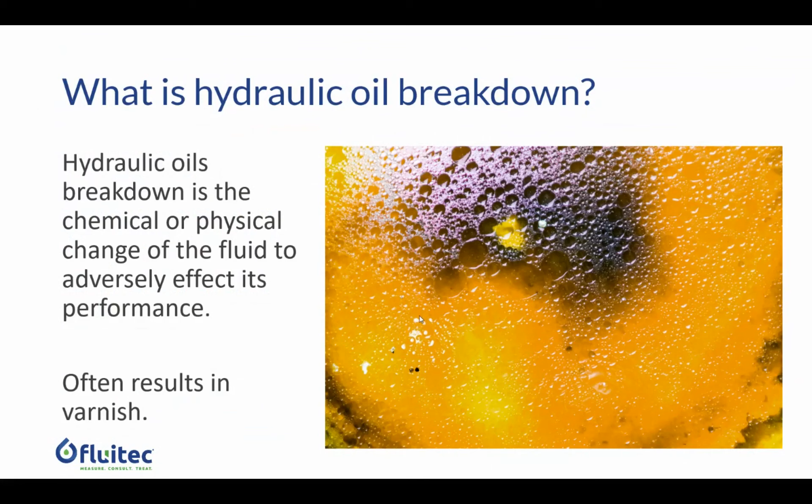It's basically when you have a chemical or physical change in the fluid that starts to adversely impact the performance. And often the result of these chemical or physical changes in the fluid forms deposits or this substance known as varnish. So what do we actually mean by varnish? Well, varnish is just a generic term. And there are literally dozens of different chemicals that will make up a varnish deposit. So it is based on the operating conditions of the machine, formulation of the oil, and all sorts of various different contaminants that may ingress into the fluid that can create unique new oil degradation pathways. So we just define varnish in a very simple way by saying it's an oil-derived deposit.

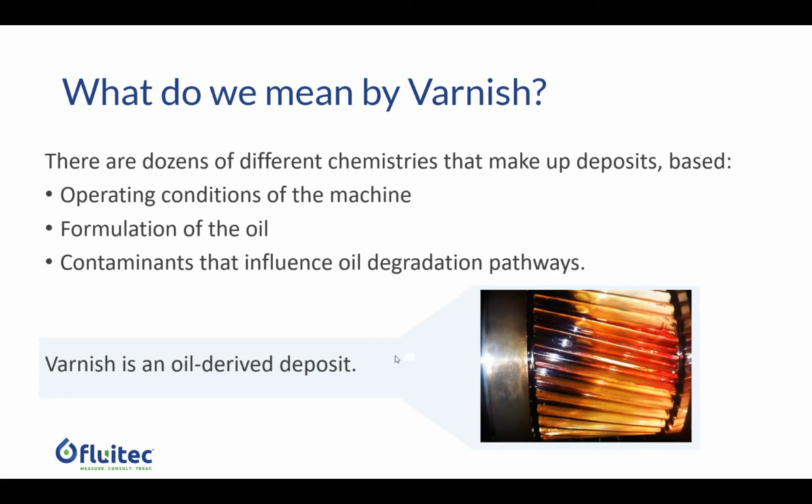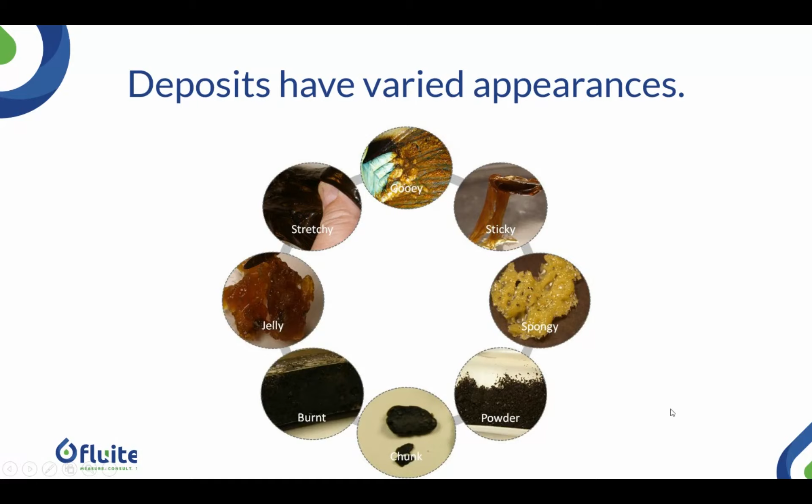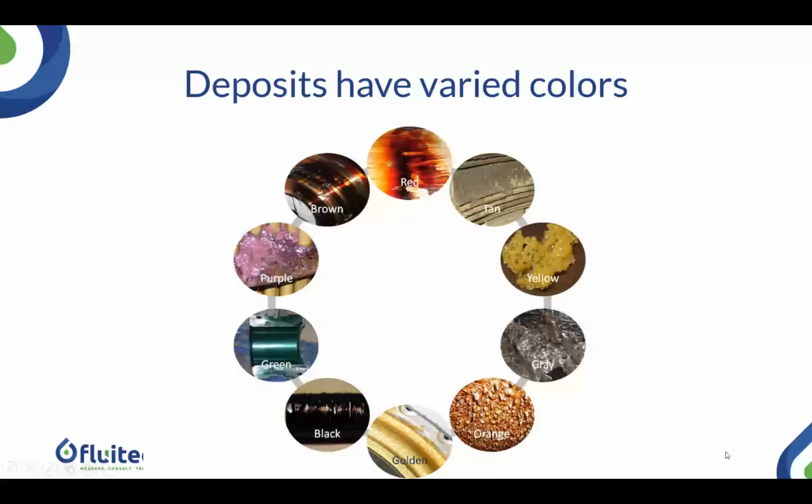These deposits come in a wide range of different appearances. They can be gelatinous in nature, or gooey, or stretchy, or sticky, or powdery. So we see it come in a wide range of different consistencies, and not quite a rainbow of colors, but many different colors as well. We've seen some really bright colors to some very dark black, grayish colors, and almost everything in between. But ultimately, there are various different modes of degradation that are causing this fluid to break down.

If you happen to see my colleague Jo's webinar last week, he showed this slide, and he was talking a little more on compressor fluids and journal bearing challenges, and focused on gas and incompatibility as a couple modes of failure. So I'm going to just talk about oxidation and microdieseling. And again, going through this in detail is probably beyond the scope of this webinar, but the big point I want you to take away from this is that there are, in fact, multiple different modes of degradation that can be occurring and causing the fluid to break down.

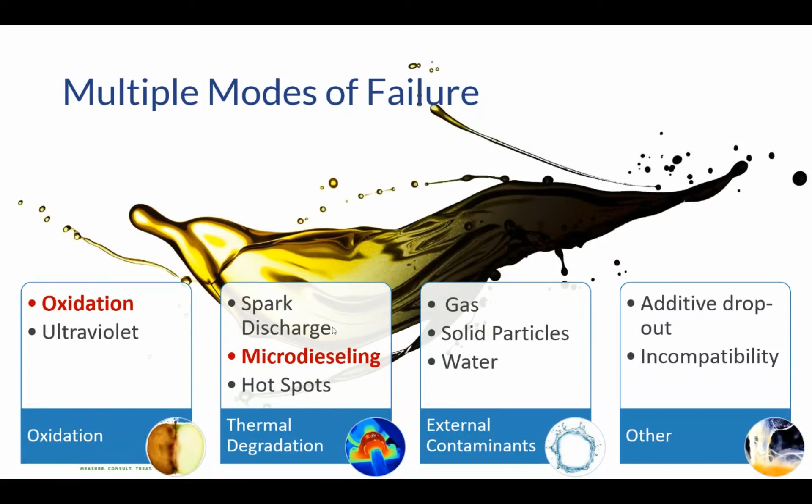So the first one is oxidation, and this is intuitively something I think we all understand. And using an apple as an analogy makes it pretty easy. We use this analogy for two reasons, because everybody knows what will happen if you take a bite of an apple and leave it exposed in your room for a period of time. It's going to start to oxidize almost while you're watching it. But we also like using the analogy of the skin of the apple being akin to antioxidants that may be in your fluid. It makes up a very small percentage of the overall volume of either the apple or the oil. But as soon as that little protective layer is removed, then the apple, or in the case of the oil, will fail rapidly.

So what is actually happening here is that when oxidation occurs, essentially this is just the formation of, it's corrupting a molecule and forming an unpaired electron. And basically this molecule is not very comfortable having an unpaired electron. So it's looking to grab another electron from something, and it will grab another electron from a healthy molecule, and it triggers this chain reaction. And it will continue to go on and on and on in a process that we call autooxidation, until all of the healthy molecules have been corrupted, and or there's something that terminates that.

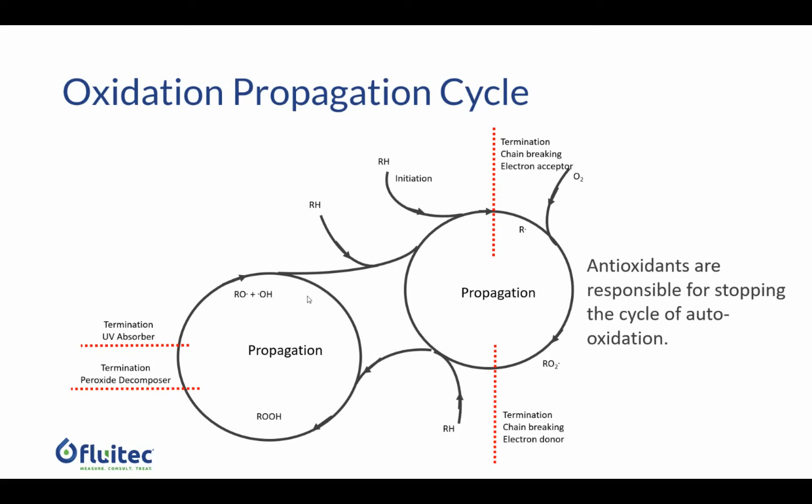And so what actually terminates this auto-oxidative reaction are antioxidants. And so there's a couple different types of antioxidants. You can have primary antioxidants, which will either accept the electron or donate an electron to the molecule, or you'll have a secondary antioxidant, which will actually decompose one of the oxidative degradation products known as peroxides. So the thing to keep in mind here is that once oxidation happens, if you don't have any antioxidants in your fluid, this is a reaction that will continue to go on and go on and go on until everything fails.

I would say it's not so common, especially in newer formulations. In older formulations, say using a group 1 base stock with a little higher solubility, it keeps all of these degradation products in solution. Some of these degradative products will have a higher hydrocarbon chain length and higher molecular weight, and will therefore impact the viscosity of the fluid, whereas with more hydro-treated, highly refined base stock, like a group 2 or a group 3 base stock, these degradation products are really not so stable in the fluid and will come out and form deposits. And so in most group 2, group 3 formulations, you don't actually see viscosity as an impact of oxidation nearly to the same level that we did a decade or two ago.

So the second mode of degradation, which really ties specifically to hydraulic applications, is a process called microdieseling. Microdieseling is a phenomenon where we've moved from the slow, gentle degradation of the fluid from an oxidative perspective to a much more rapid event-based degradation, dealing with really high temperatures that we would categorize as thermal degradation. Thermal degradation essentially is when you have a high enough temperature that can actually crack the backbone of the hydrocarbon base stock, and typically we're seeing events that cause these really, really high temperature zones in the fluid.

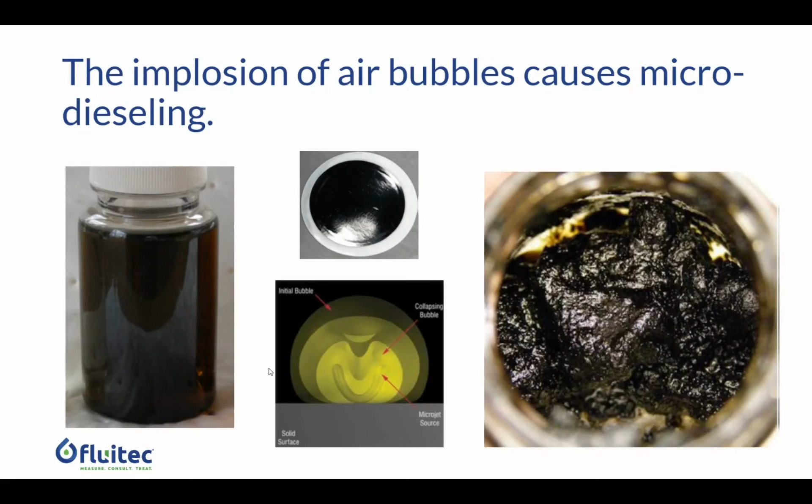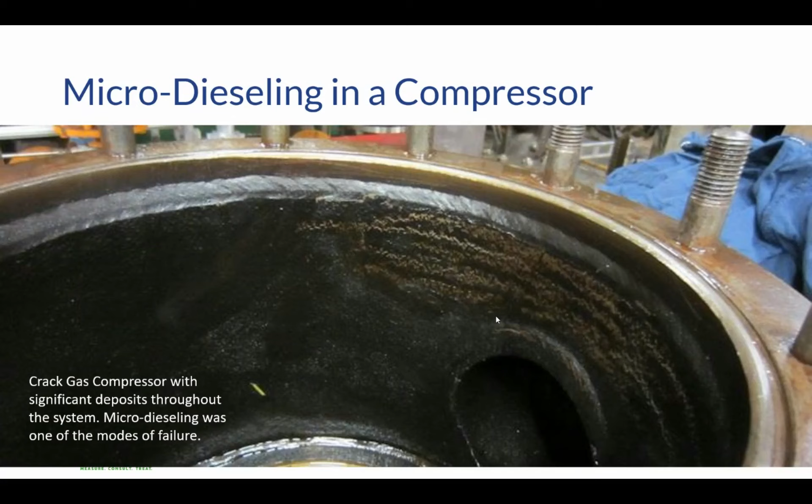One of the primary places that we see this is in phosphate ester electrohydraulic control systems for steam turbines. There are some hydroelectric hydraulic systems and the governor system that may have microdieseling. Sometimes we see it in compressors, but microdieseling is very much an application-based degradation mechanism. For example, we've never seen this in, say, a gas turbine or a steam turbine. So it's very much application specific, and it's especially susceptible to hydraulic systems. So just keep that in mind. If your fluid starts to turn black, you may have microdieseling, and then there are specific things you can do to correct that problem.

And just a little public service announcement: social distancing is something that we are all practicing right now. This is actually not too bad for your oil as well. Just along the lines of compatibility, oils don't mix so well. Practice social distancing on your lubricants as well.

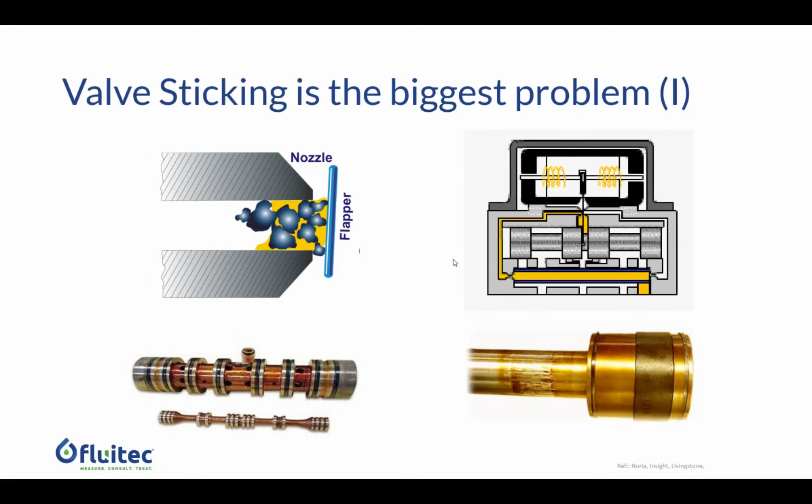All right, so that's just a little bit about oil breakdown. Why do we care? Well, essentially, oil breakdown is impacting and impairing the performance of the lubricant, which ultimately relates to your operation and the profitability of your operation. Some of the impacts that we see with deposit formation: valve stiction is a big one. As a servo valve is moving, there are extremely tight tolerances, and just a small buildup of deposits can really impair the functionality of the valve, may cause the valve to stick, or in some cases seize, and your system's not going to operate or be controlled so well if your servo valves aren't properly being exercised.

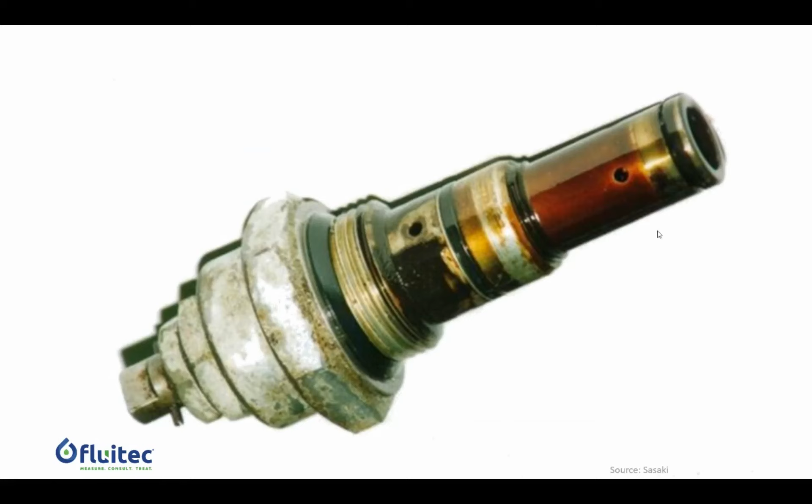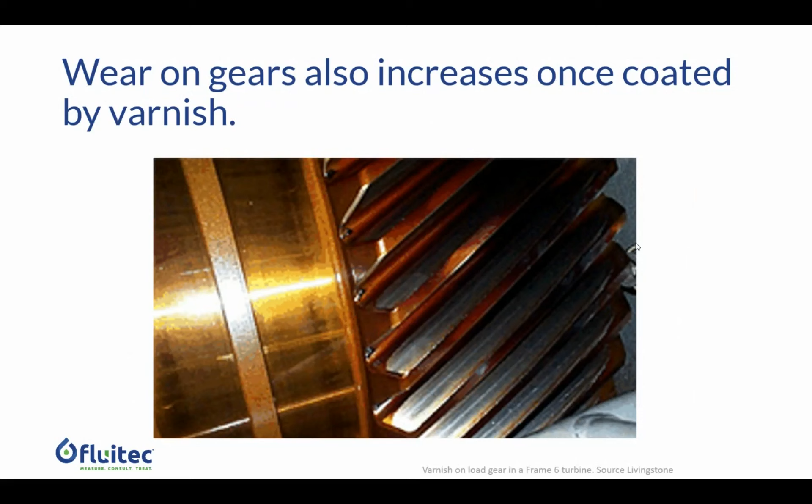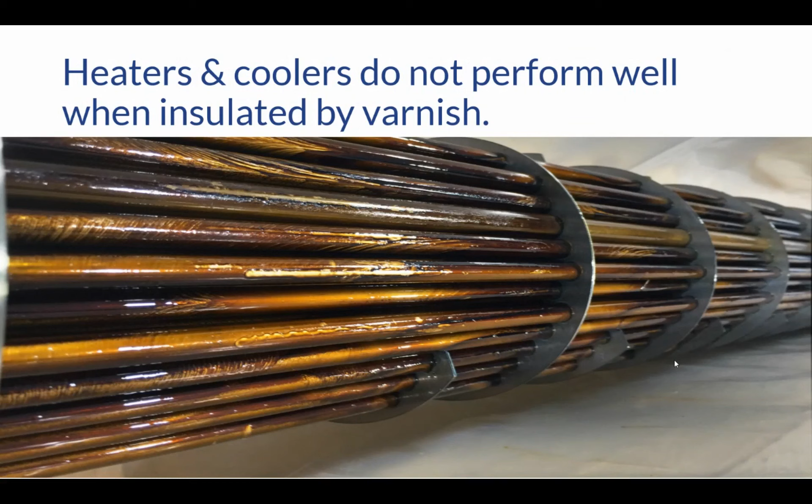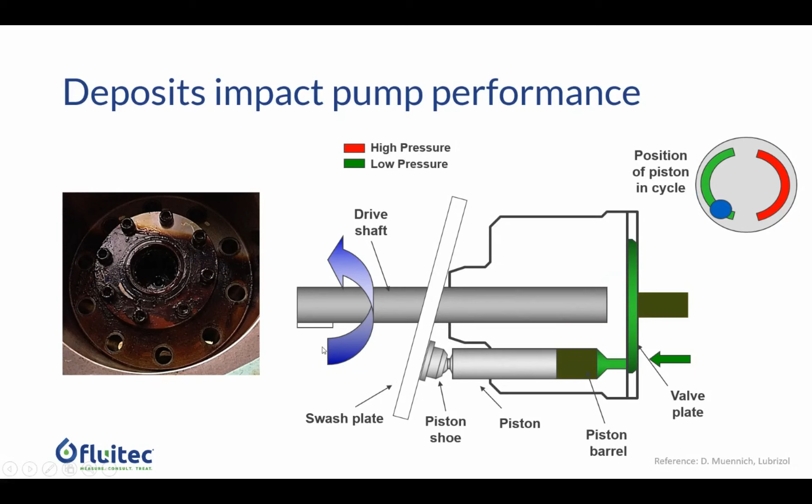This is a picture from a plastic injection molding machine, also a fairly heavily varnished valve. Varnish can also coat filters, causing filters to slime over and shorten their life. If you have deposits on gears, varnish can attract other dirt, debris, and wear metal material and create a sandpaper-like surface and actually increase the wear rate in gears. Heat exchangers are a fantastic place for varnish to form. Unfortunately, one of varnish's properties is that it's a great insulator, so if you have a plugged or coated heat exchanger with deposits, it's not going to function so well, and therefore it's not going to allow you to maintain the temperature of your oil. And then finally, in hydraulic systems, we see pumps are also impacted by deposits, and so we see premature pump failure as well.

Okay, so we're going to do a quick poll here, because I'd like you to see what is the biggest management problem that we see with hydraulic oils, and I'd love to get your thoughts on this. So let's go over to Greg. Can you run the poll here for us?

All right, I will open it up right now. What is the number one biggest management issue with hydraulic oil? The correct oil analysis tests are not performed. Incompatible fluids are mixed together, resulting in deposits. Cheap oil is purchased, and people are basically buying cheap oil, and that fails rapidly. Or poor storage practices. Let's see. Show results.

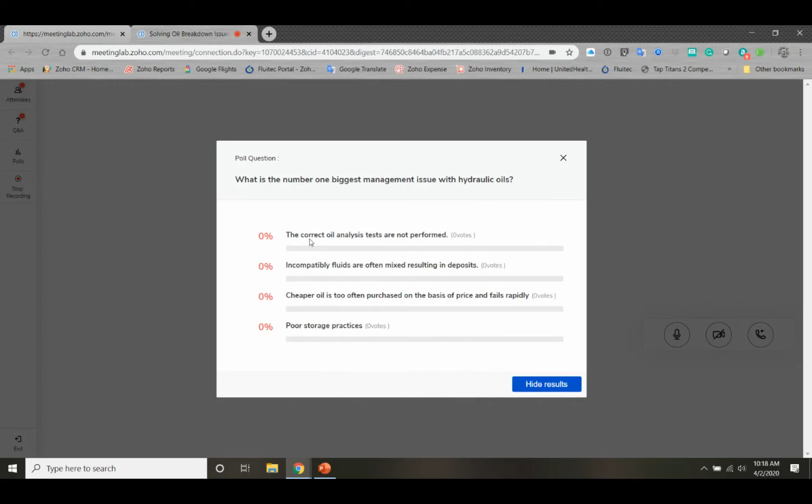Let's see. Does this give you an opportunity to select one of these four options? Well, I don't see where it gives an opportunity to poll. We'll work on it. Just continue on. We'll work on this. Okay. All right. That sounds good.

Okay. Excellent. Well, I want to make the argument here that all of the different answers can certainly be challenges. If people are buying the cheapest oil possible, that's certainly a challenge. If you're not storing the oil properly, that's a pretty major challenge. But I really believe the biggest management problem that we're seeing with hydraulic oils right now is on the oil analysis side.

One of the business philosophers or strategists that I really like is Edwards Deming. He has the saying, you can't manage what you don't measure. This is a principle we hold dearly at Fluitec. Pretty much everything we do, there are metrics around it and we measure. But from an oil analysis point of view, this is why we're doing oil analysis. And if you are not running the right tests that identify how the oil is failing and breaking down, then you're going to run into problems. So this, I think, is the biggest management issue we have in the world of hydraulic oils. So let's talk a little bit about how we go ahead and measure these fluids.

Some of the key tests for monitoring hydraulic oils: viscosity. You want to look at contaminants, interaction with contaminants, chemical changes, and oil degradation. Ultimately, when you select your test slate for oil analysis, the first thing you need to understand is what the modes of failure are, what things should I see that will change over the life of the fluid, and how does that directly tie to the performance of my equipment and my fluid.

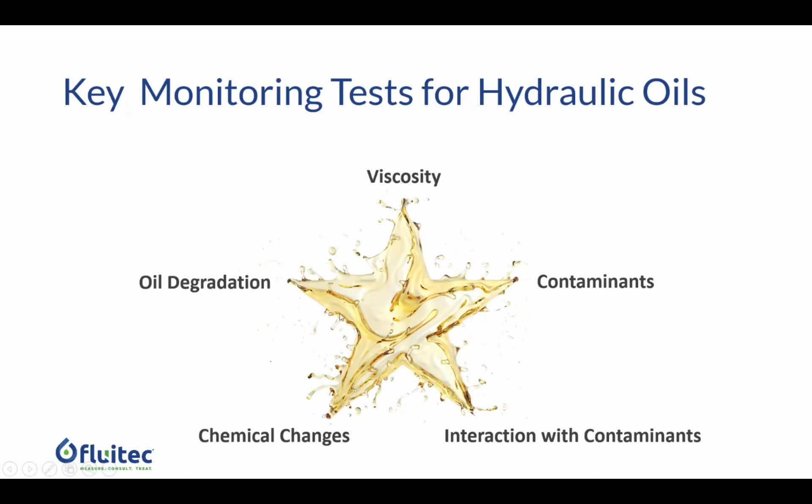Contaminants: in the world of hydraulics, hydraulic oil users are really on the cutting edge of this. Understanding particle counts and water is really critical. Interaction with contaminants: how does a fluid interact when you have a bunch of water mixed into it? How quickly does it separate from water? Or air bubbles. Do the air bubbles form at the surface and create foam? Do the air bubbles dissipate quickly when they are contained inside the fluid? These are all important properties to manage. And oil degradation certainly as well, because it is one of the primary modes of this fluid failing. So we should be understanding oil degradation.

So all critical properties that we want to monitor. The next is oil degradation. And so oil degradation, again, I would say this is really one of the biggest problems that we see with hydraulic oils. Most hydraulic oil users are running oil analysis. However, traditional oil analysis packages do not do a very good job of identifying varnish problems.

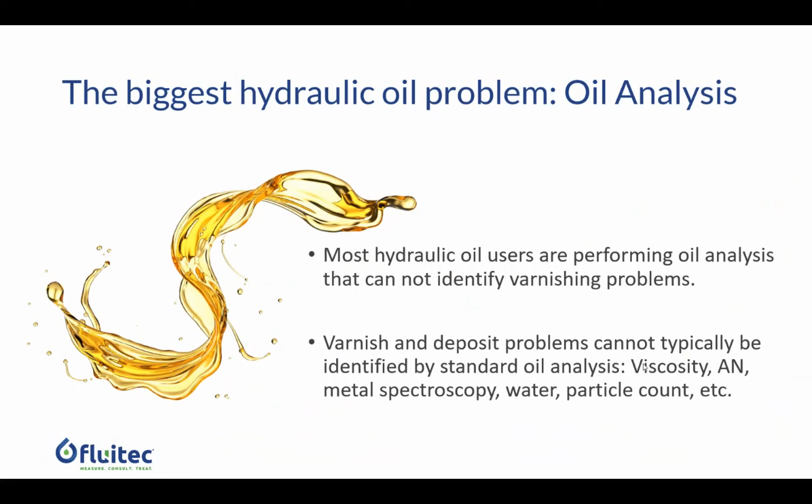So viscosity, acid number, metal spectroscopy, water, particle counts. In most cases, these cannot tell you if you have a varnish problem. However, we have a really simple, good tool for this, known as the membrane patch colorimetry test, or MPC. And ASTM D7843 is the test procedure for this.

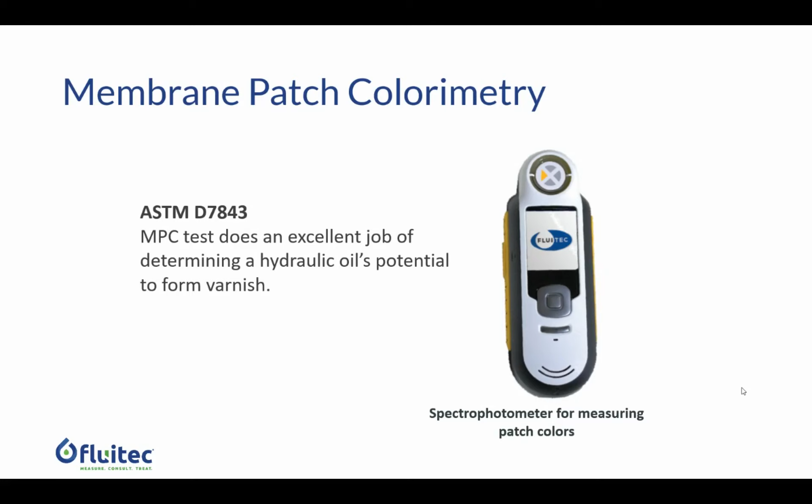This was developed for turbine oils, starting in the early 2000s, really to address this varnish pandemic that was impacting gas turbines. And again, in the world of gas turbines, all of these gas turbine failures and unit trips were happening, and all of the oil analysis results said everything looked good. So we had to develop a test specifically to look for varnish formation.

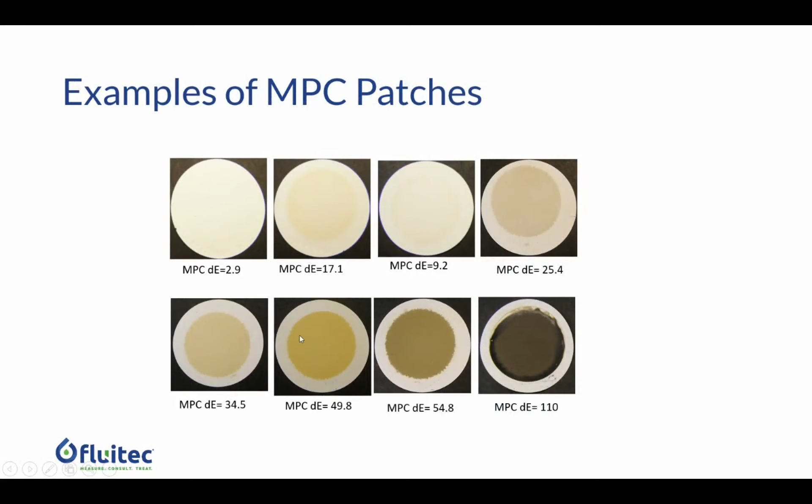The MPC test is a simple test. You add a little bit of oil with a little bit of solvent, and you filter it through a membrane. The membrane is 0.45 microns. Basically, if the color of the patch is dark, there's a high chance that you have varnish. If the color of the patch is light, it's suggesting that you may not. So it's a simple test. We use this little color spectrophotometer here to actually measure and quantify the color on this patch.

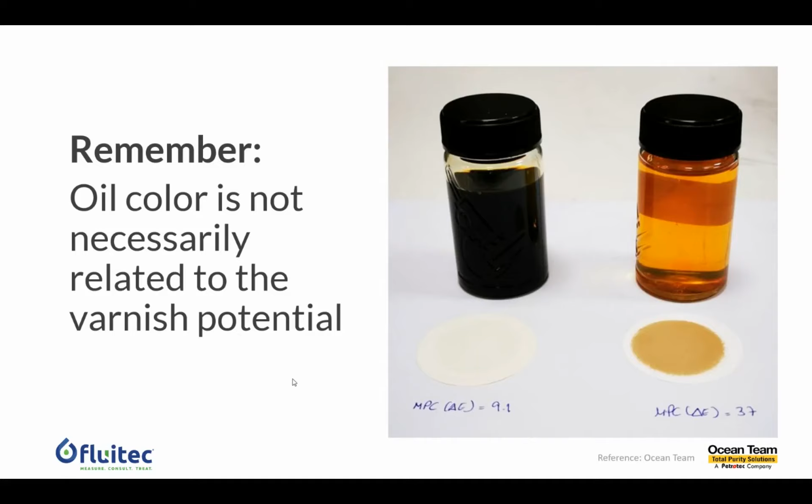So the MPC test, even though it was developed in the early 2000s for turbine oils, the history of this dates back earlier than that. The first iterations of this were developed in Japan by Dr. Suzuki, and it's a colorimetric analysis that he used on literally over 10,000 hydraulic samples. So this is something that is very well suited to hydraulic oil applications as well.

And so this is just kind of a thought exercise, but I don't think we've published any details on this. But we've done a lot of testing in our lab on this, and typically an MPC of 40 will represent about 200 ppm of oil degradation products. And that's kind of surprising. It's a pretty low value, I think, especially because it can create a lot of deposits that you can see throughout your whole system. But it actually makes up a fairly small amount of material that's actually in the oil. Okay.

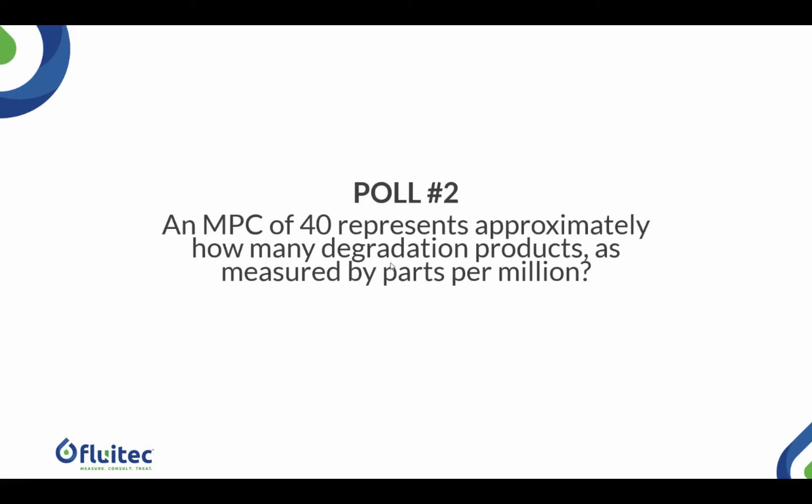One thing that I have been questioning recently is that it seems that hydraulic oil users have been absolutely on the cutting edge of understanding particles and ISO particle counts, however, there's really a lag compared to, say, the power generation world in measuring oil degradation products. Why is this? So in reflecting on this, I think it's a little bit of an issue of the fact that oil degradation products in turbines will cause really expensive events. So a trip can be an extremely expensive event for a power plant, which warrants immediate attention and a lot of focus from senior management on what happened with this oil.

Why is the unit no longer producing power? Whereas in hydraulic systems, there are so many controls that typically oil degradation products and varnish will result in a slow decay in the system and reduced efficiency over time, but not necessarily big expensive events. And even if you have a pump fail or a valve fail, which can be somewhat common, hydraulic systems are often smaller, so it's still not a super expensive event.

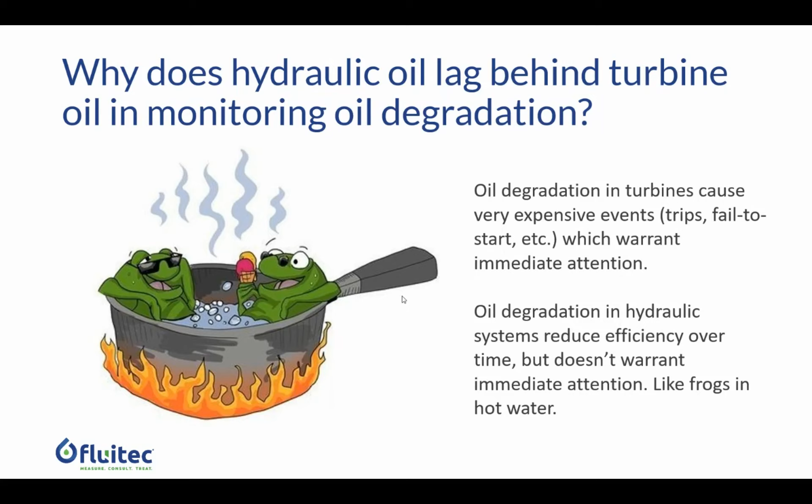And so I'd like to think of the analogy of frogs sitting in hot water, who will sit there until it's boiling and don't really notice until it is boiling. I think this is one of the contributing issues why we see oil degradation testing not performed as regularly as it should be with hydraulic oil users. So don't be frogs in hot water. Run your MPC test.

All right. The next part I want to talk about is one of the additive components that is very common in many hydraulic oil formulations. It's a chemistry known as zinc dialkyldithiophosphate, or ZDDP, a really cool additive that we've been using for decades. It's fairly inexpensive and provides not only strong anti-wear protection, but also antioxidant protection, so it's a multifunctional additive chemistry. Since it's in so many hydraulic oils, it's important to understand how to measure its health.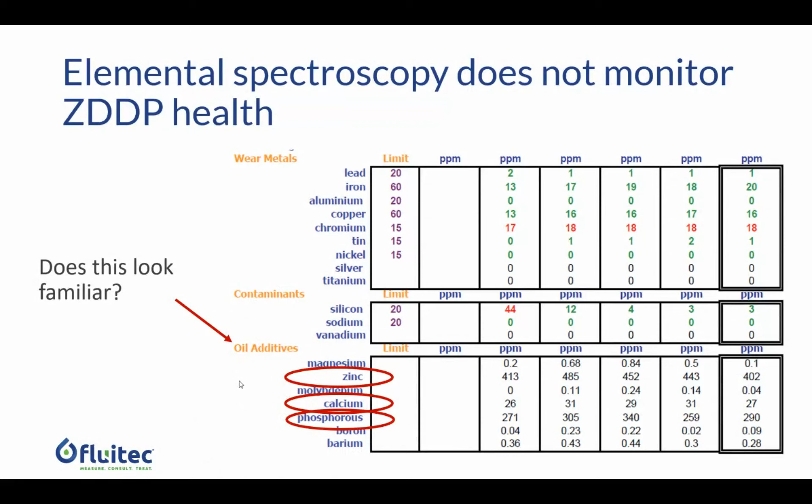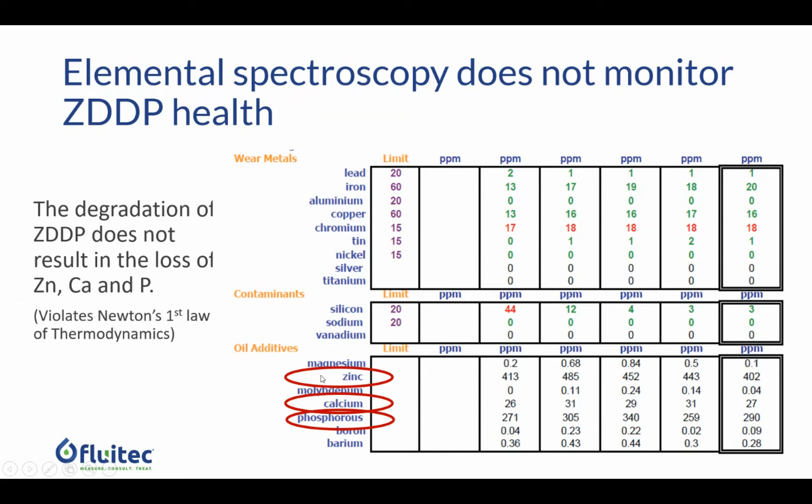A lot of people will just look at this value and say, hey, my hydraulic oil is healthy, everything looks good, zinc hasn't changed at all. When in fact, the ZDDP molecule may be completely decomposed and not providing any protection in your system at all, but it's still showing up as zinc until it actually comes out of the fluid and forms sludge. It's always going to be measured in the fluid, and does not necessarily tell you the health of the ZDDP molecule. So how can we best understand this chemistry?

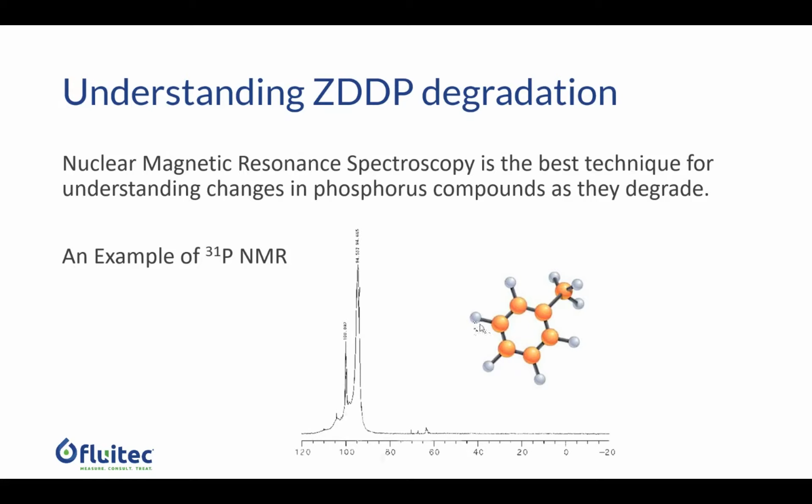I'm not going to go into great detail on this, but this is a cool example that shows some of the complexities involved with ZDDP chemistries. This is a test known as P31 NMR, nuclear magnetic resonance spectroscopy. It's very similar to an MRI. If you ever go to the doctor and need an MRI, it's a very similar test, but in this case, we are looking at changes in phosphorus compounds. And here is some of the complexity that we see with ZDDP degradation.

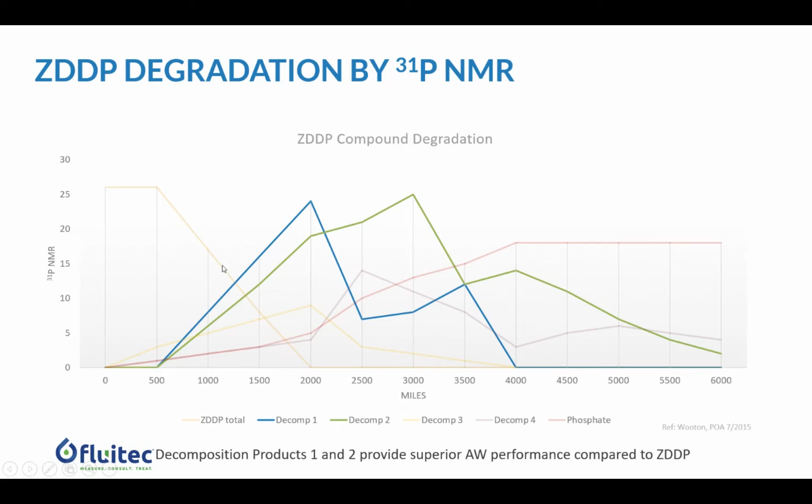This is an engine oil application over 6,000 miles. The first thing we're looking at is the actual ZDDP molecule, and at 2,000 miles, there's no more ZDDP. It's completely decomposed. However, decomposition products have formed through this degradation, and decomposition products 1 and 2 can actually provide superior anti-wear protection compared to the original ZDDP molecule. So even though ZDDP is depleted, it's still providing a strong level of AW performance.

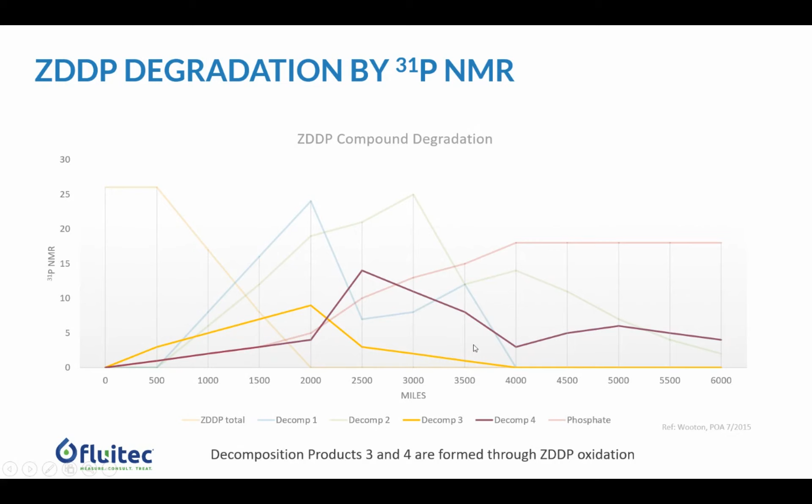The next two decomposition products are formed through oxidative reactions, so again failing through a very different reaction, no longer an anti-wear reaction but more of an oxidative reaction. And then the final product from ZDDP degradation is a phosphate, which gradually forms as these decomposition products are reacted out as well.

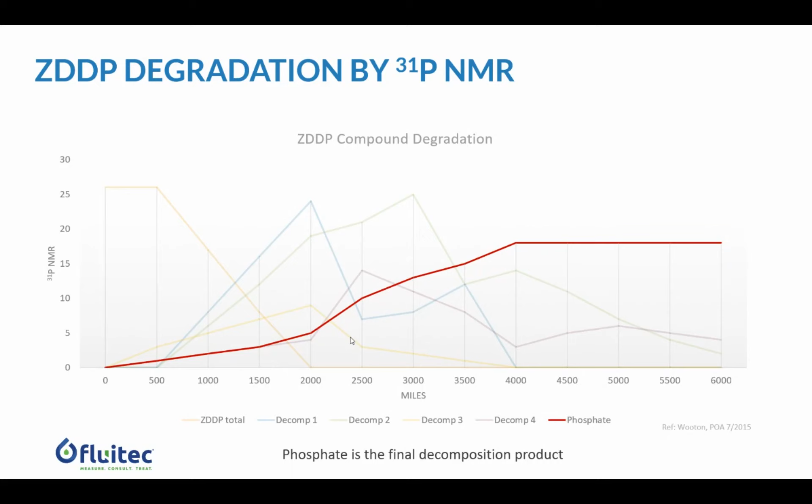So what a cool tool. Are we going to incorporate P31 NMR in our oil analysis program? No, I would say this is much more on the research side of things. It's an expensive test, and it's really complex to understand the chemistry. The purpose of me going through this is not to encourage you to incorporate it in your oil analysis program, but just to give you an example that there are a lot of things going on when ZDDP is decomposing.

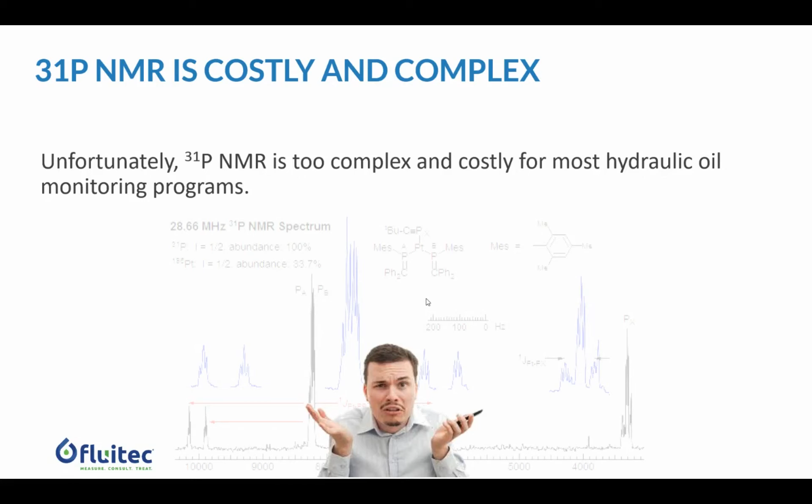And at the end of the day, you still will have a little bit of zinc and phosphorus and calcium left in the fluid that you're measuring in your oil analysis program. And it doesn't necessarily mean the oil is not healthy. So one of the things you can do that's much more economical, that all labs should be able to run for you, is a D7412 FTIR test, which is looking at the total spectrum of the ZDDP molecule, and this can provide some level of indication of the health of that molecule.

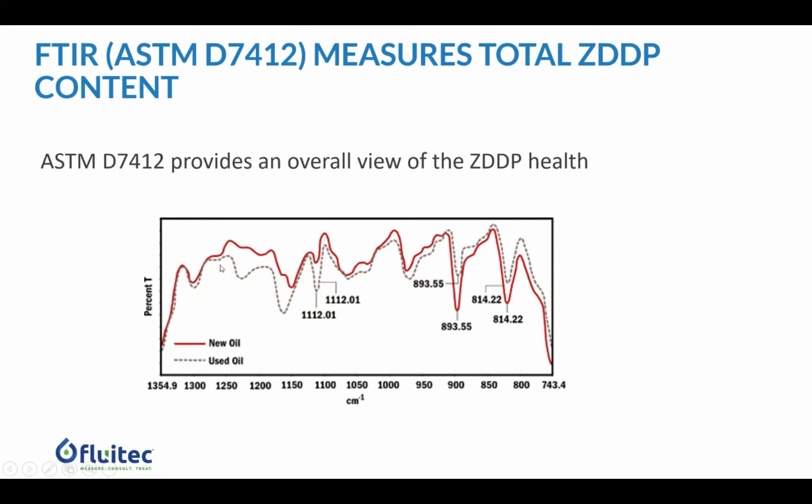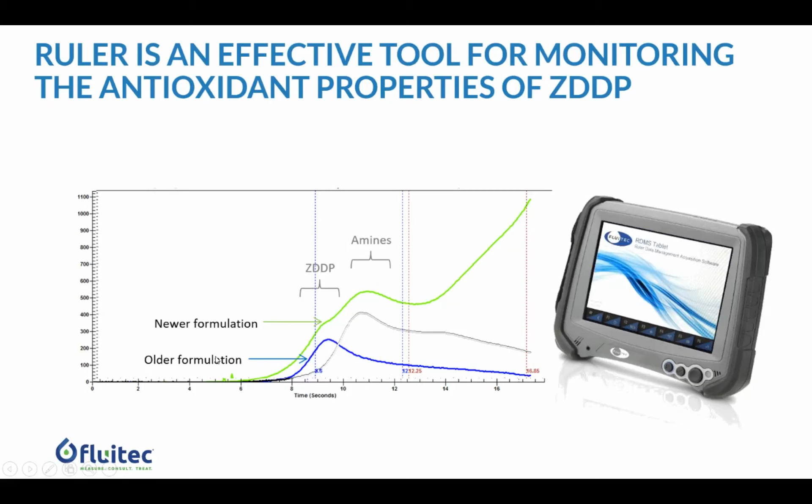The other thing is, because that ZDDP molecule acts as an antioxidant, the RULER test is really good. So the RULER test is not measuring zinc or phosphorus, it's measuring the antioxidant properties of the fluid. And so even if the antioxidants are completely gone, it doesn't necessarily mean the antiwear properties are gone. So that's just something to keep in mind. But if you add these two tests together, it really can give you a better insight into the health of your ZDDP molecule, whereas I would say elemental spectroscopy does not really reveal too much about the health of this particular additive chemistry.

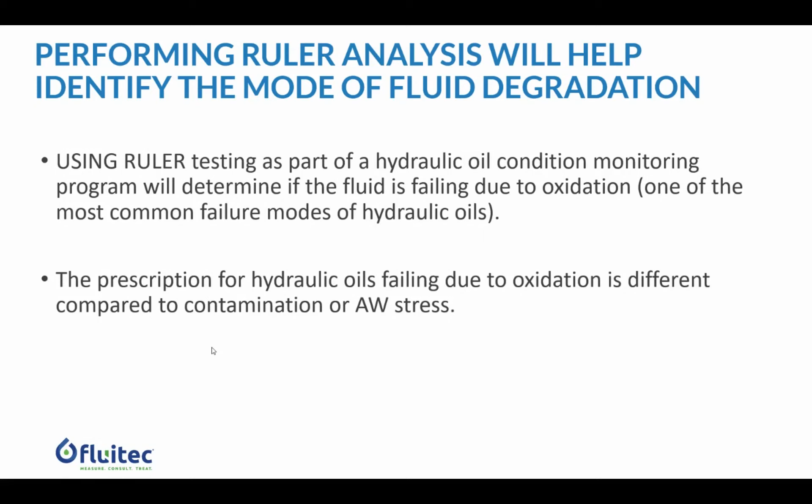Okay, a little bit on oil analysis. I think the big takeaway here is fluids are failing. Hydraulic oils fail often due to oxidative stresses and the formation of deposits. You don't want to be blind to this, and ignorance is not bliss, because it will in fact result in operational issues and costs. So it's much cheaper to understand the issue and do the right test at the right time.

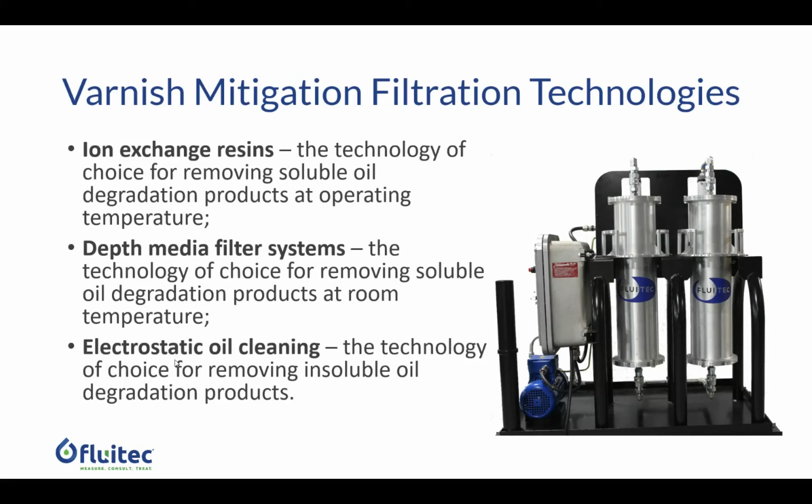The next thing I'm going to talk about is different things we can do to control these degradation products in hydraulic fluids. So varnish filtration technologies is something that I would say is near and dear to my heart, and what Fluitec's been involved in for the last quarter century. We have done a lot of work with resin media to remove soluble contaminants. Depth media is also a technology that we employ, and electrostatic oil cleaning. All of these technologies work really well if you apply them to the right application at the right time.

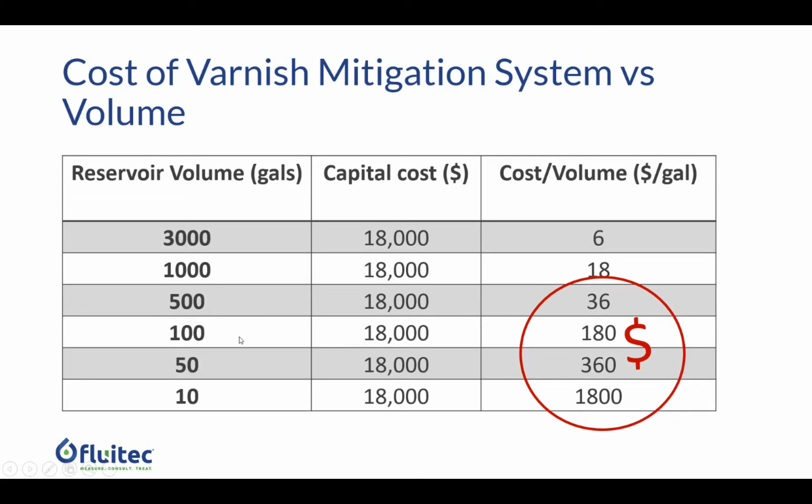However, when you start to deal with hydraulic systems that may be a little bit smaller in size, the cost of a dedicated kidney loop filtration system becomes pretty high. If you have a 3,000 gallon turbine oil system, or even a 3,000 gallon hydraulic system, the cost of the system per gallon of oil is somewhat reasonable. However, as you get down into much smaller systems, it becomes pretty expensive. I am not aware of anybody with a 100-gallon system who has put a kidney loop varnish mitigation system on. So it becomes somewhat cost prohibitive.

So one of the things that we have been spending a lot of time investigating over the last decade is a solubility enhancer. Is there a way that we can increase the solubility of the fluid to allow it to hold on to oil degradation products? Having a bunch of oil degradation products contained inside the fluid is not necessarily a problem. It's only a problem once they come out of solution and start to plate out in the internals of the system. That is when challenges start to happen. So is there a way that we can contain all of this in the fluid, and not only use a solubility enhancer to decontaminate the deposits that have already formed in the system, but also prevent further deposits from happening?

Well, before we can answer this, the first thing is, if you do look at a solubility enhancer, it has to be practical. In other words, it doesn't make sense to have specialized blending equipment. That is just impractical. You have to be able to add something that's fully miscible, that has a wide range of compatibility, not only with the oil, but also with system materials such as seals and paints. And it has to be really effective at solubilizing oil degradation products. So that's the first thing. The second thing is, it has to be safe. Even though this is a pretty simple, scalable solution, if it could adversely affect the other performance properties of the fluid or the additive components, then it doesn't make sense.

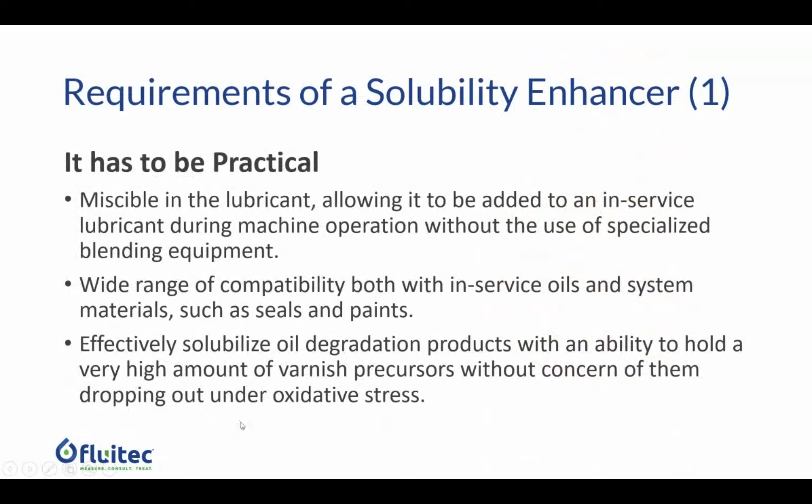So compatibility is a really important property, essential for this. Also, you need to ensure that adding something to the fluid doesn't impact the fluid's ability to interact with contaminants, like air or water. It also can't have any surface active properties that could interact with corrosion inhibitors, other surface active additive components, or EP agents. And the final thing is, you don't want to add something to the oil that will oxidize and, long term, start to create additional varnish.

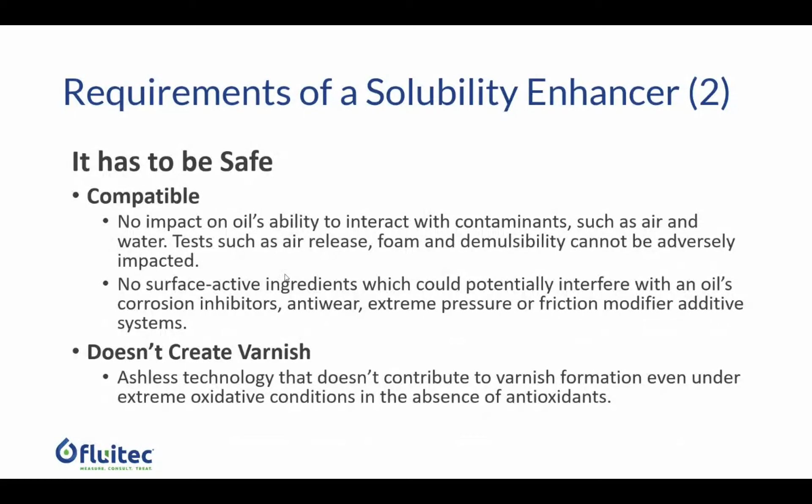So if you want to add something to the in-service oil, you want to add something that is not going to contribute to deposit problems. So we've developed a technology that we refer to as Solvancer, solubility enhancer. You can probably see how we came up with that name. And this technology, in various iterations, we use in different products.

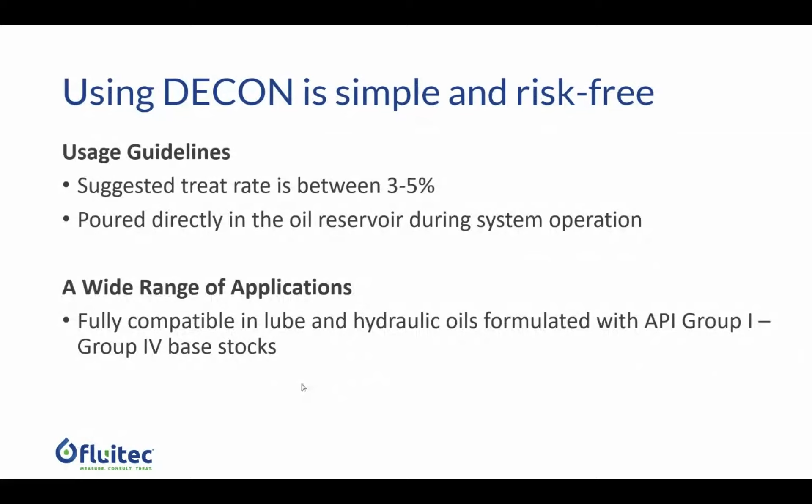In the world of hydraulics, we have a technology referred to as Decon, and it's a chemical solution for varnish, and it's really simple. You can add this at a treat rate between 3 to 5% into the in-service operating fluid, and it has a wide range of compatibilities from Group 1 to Group 4 fluids. From an additive point of view, we would say there's no issue with antioxidants, or with EP or AW agents. However, we probably would not put this into a detergent dispersant-based system, like engine oils. We would not add this to engine oil type applications. Again, this works by increasing the solubility of the fluid and dissolving oil degradation products.

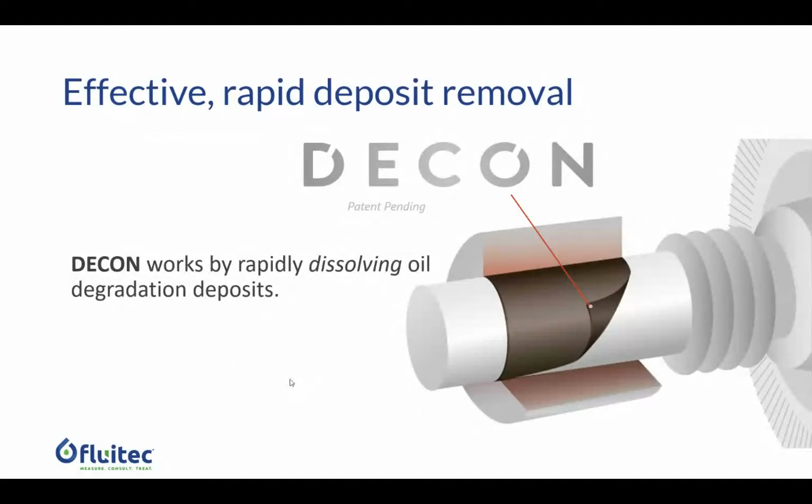So how can, if you're increasing the solubility of the fluid, well, there are some soluble and some maybe not so soluble or insoluble components in the fluid, especially in hydraulic applications. We just showed the final degradation product of ZDDP as a phosphate. Phosphates are not so soluble in in-service oils and may actually come out of solution and form an inorganic, insoluble deposit.

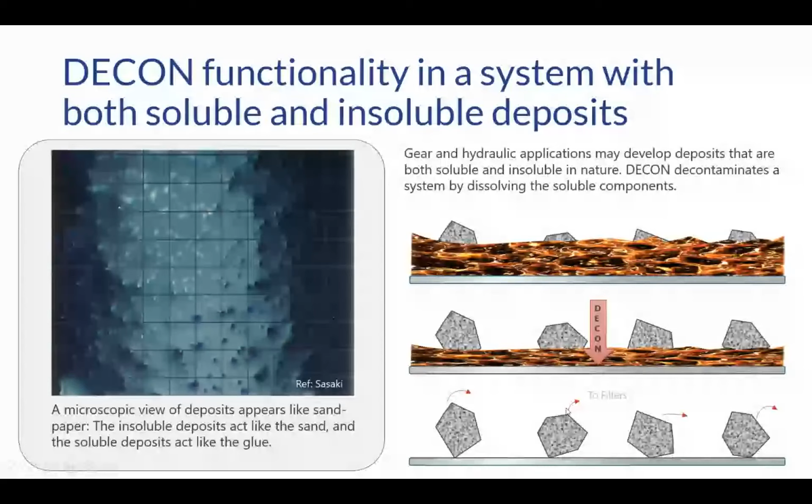And this is a microscopic image of varnish, and all these little dimples that you're seeing here are basically hard contaminants that are stuck to this. We like to use the analogy that it's like sandpaper. The insoluble components are like the sand that's stuck to the glue, which is the soluble components, and that is a varnish. So if you add Decon, you're not going to dissolve, say, dirt in the system. However, you will dissolve the varnish. It's kind of holding the dirt onto the system, and then that is able to be released and captured with normal inline filters.

The other thing is, how does this work long term? And also, how quickly does this increase solubility? How quickly does this get filled up? We do know that varnish itself actually makes up a fairly small percentage of the oil, 200-ish ppm. We could see higher levels than that, but a relatively small amount. But it's important to see how this works long term.

So this is an example of a new oil that we beat up in a really accelerated oxidation test that basically stresses the oil at 120 degrees C for about 6 weeks, with catalyst and air bubbling through it. We want to try to kill the oil. So with new oil in this particular case, we saw the antioxidants depleted, and we see a fairly high varnish level. You add the Solvancer technology to the new oil and run the same test again. It's not impacting how your antioxidants are depleting. It's not impacting the oxidative stability of the fluid or the acid number, but oh my goodness, it has a very significant impact on the formation of deposits.

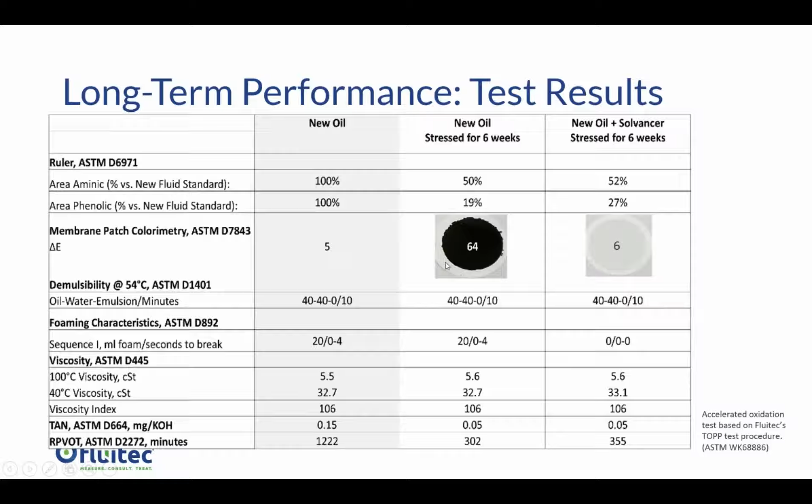And we have correlated this particular test to in-service fluids, and this equates to about a year of service in a large frame gas turbine for 1 week, which is already a pretty stressful event. So this is maybe looking at 6 years in an especially stressful, say in this case, a large frame gas turbine. Hydraulic oils are not going to last as long. Typically with hydraulic oils, after 2 to 3 weeks, you're going to see a much higher level of degradation. But what happens if you run this out for a really long period of time? This is just a visual example here, the glassware and the deposits.

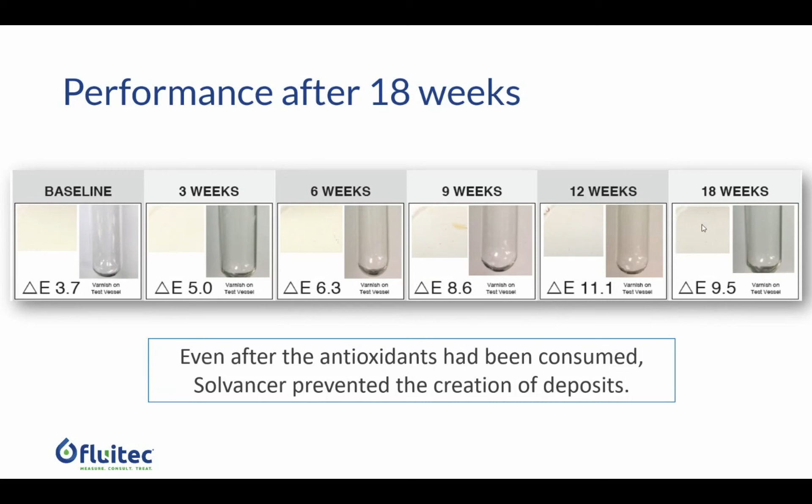But if you run this out for a really long period of time, here we have Solvancer that's been added to this fluid that after 18 weeks, so 3 times longer than when most oils are failing, we still have single-digit MPC values. And interestingly, the antioxidants were depleted in this range here. So even after the antioxidants have been consumed, it still prevented the oil from forming deposits. So it has a pretty phenomenal ability to hold a lot of contaminants for a fairly long period of time.

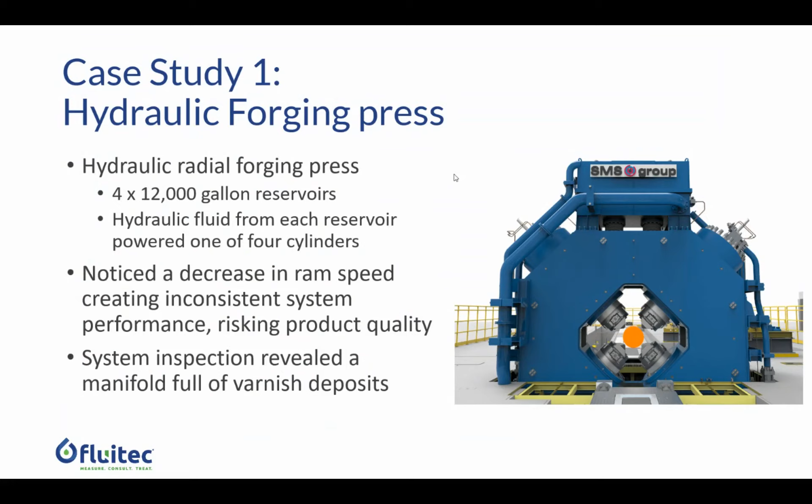So a couple of quick case studies I want to share with you. The first one is a hydraulic forging press, a fairly large system with 4 separate 12,000 gallon reservoirs. They were noticing a decrease in ram speed and somewhat inconsistent performance. They also noticed deposits throughout the system. Based on oil analysis, we saw a fairly high level of varnish, as one would expect in this application.

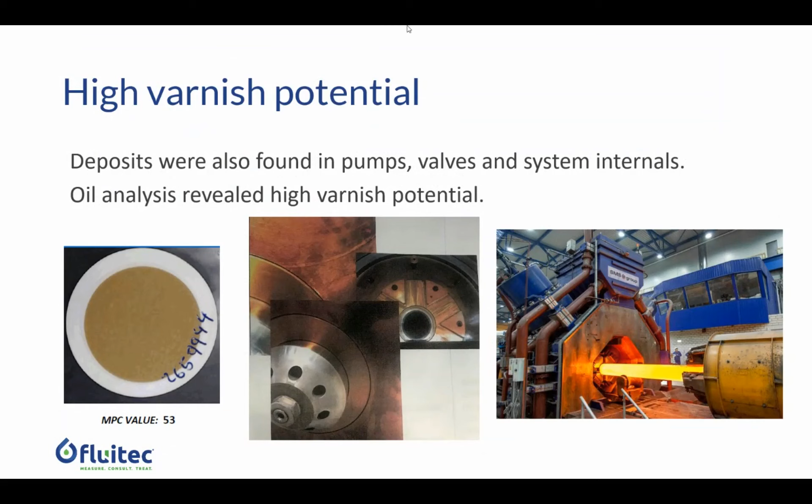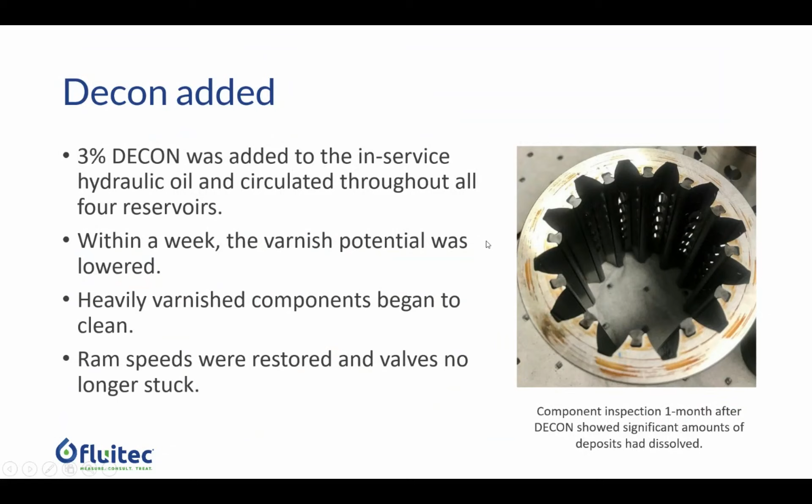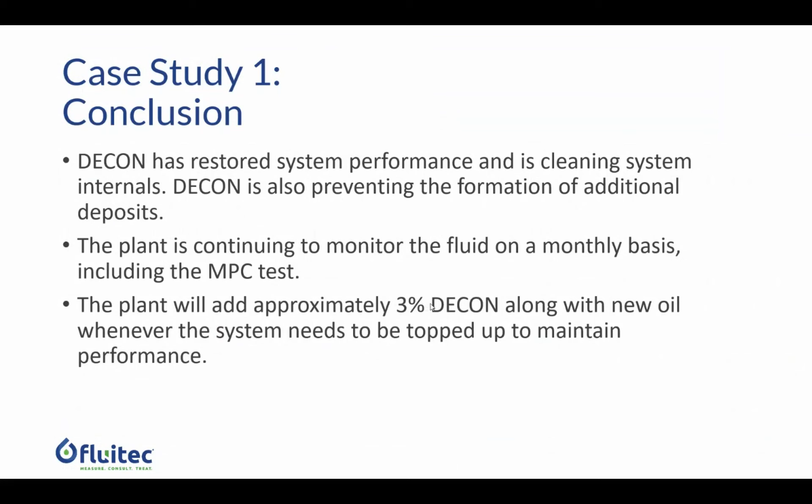So we saw that this is a fairly simple thing to add, and it resulted in a rapid decrease in MPC. Quite honestly, the customer in this case did not care so much about the MPC value. They were much more concerned about the consistent performance and the ram speed. But that is something that we saw improved. So that was a good case study.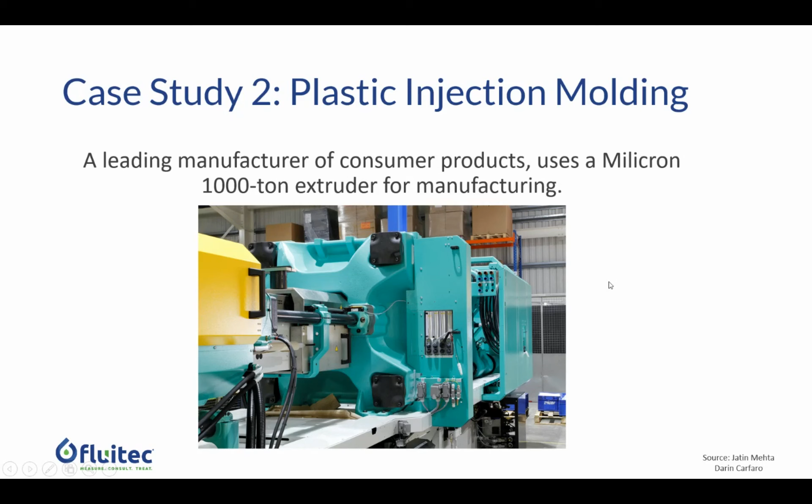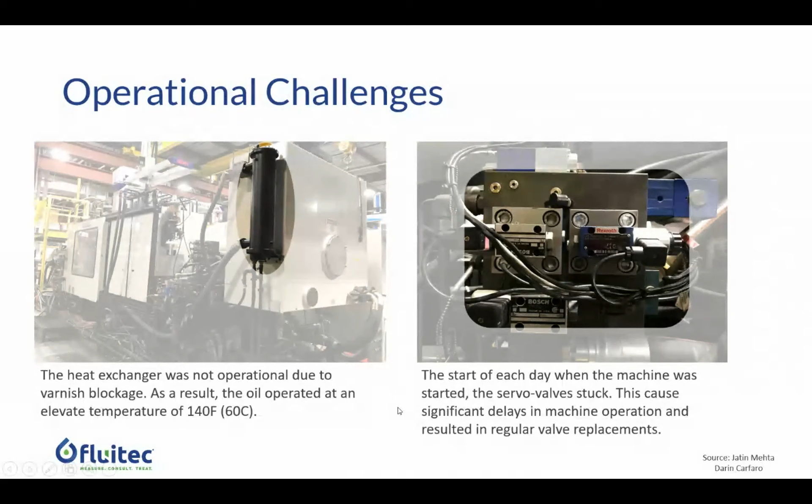And one more I want to share with you is from a plastic injection molding machine. This was a large manufacturer of consumer products. This is a Milacron 1,000-ton machine used for manufacturing, and they also found deposits throughout the internals of the system. Some of the operational challenges they saw: the heat exchanger was not operating, and as a result the oil was running at a fairly high temperature. The absolute maximum that this oil can run at is 140 F, and it was fluctuating between 135 and 140. So the oil was running very hot. Also, each morning when you start the machine up, everything is sticking, so it takes much longer to start up. Servo valves were sticking, and that was also a challenge.

So we added some Decon. If you get Decon, there's our Decon delivery boy. I'm just kidding, if Darin's watching. He's one of our sales managers.

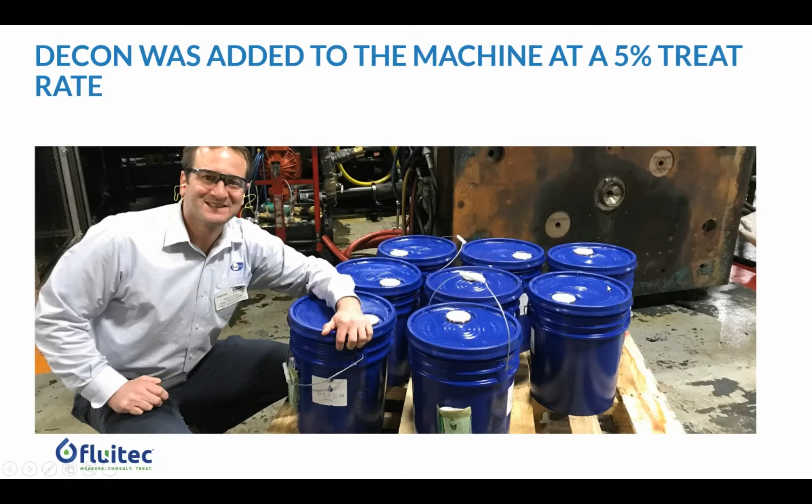So we added, in this case, a 5% treat rate. A couple of hours later, we saw the MPC drop from 40 to about 10. So that was good. But longer term, within a day, the heat exchanger started working. It hadn't been working for ages. The heat exchanger started working, and we actually saw the oil temperature drop down to 95 degrees.

So based on the Arrhenius rate equation, which basically states that every 18 degrees F or 10 degrees C increase in temperature will double the reaction rate, or the rate of oxidation, if you look at this in reverse, we are lowering the temperature by 40 degrees, so this is actually looking at maybe a 4x. Immediately, we expect a 4x impact on the life of the oil and significantly less thermal stress.

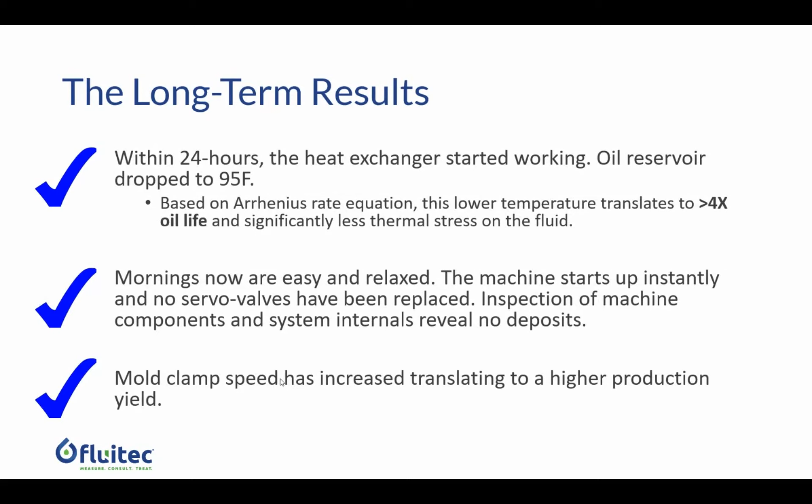So that is good. The other thing is now their mornings are a little more chill. They turn the machine on, things start working, valves start operating. There's no hammering of valves to try to get everything moving. So that has also been helpful. Also, the mold clamp speed has increased, and this can directly be tied to product yield. If you have a higher product yield per machine, you can directly tie that to profitability and how many products are going out the door. So it's a pretty quantifiable value in increasing the efficiency of this machine.

So to conclude, varnish formation is a common form of oil breakdown in hydraulic fluids. There are a wide range of different mechanisms that can be at play, but the bottom line is, if you are not actually measuring hydraulic oil for the formation of varnish and deposits, you just may not be aware of all of the performance impacts that are happening.

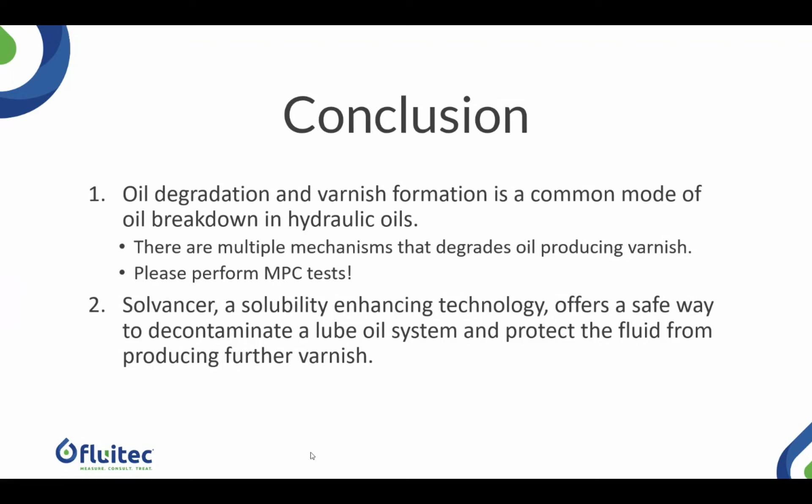So please run MPC test or another test that is looking for the varnish potential of the fluid. And the second thing is, one potential solution to this is using a Solvancer, a solubility enhancing technology. It's a safe way to not only decontaminate the lube oil system, but also protect the fluid from producing further varnish.

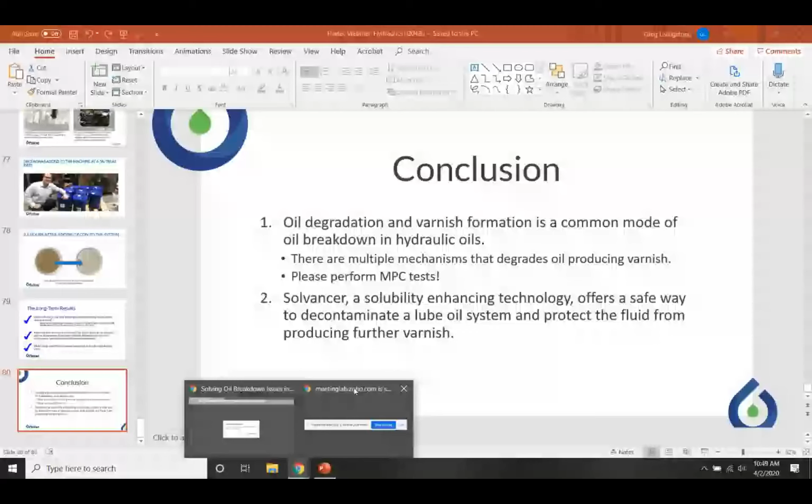So thank you very much, and I'll just pause here to see if Greg's found if anyone's asked some questions here along the way. Mike asked a good question here just a minute ago. Actually, we have a couple of good questions, but he asked when you were speaking about Solvancer, what is the maximum temperature it can be used in the system?

Okay, good question. So the flashpoint and volatility of this technology is similar to a Group 1 base stock. You can operate this up to 200 degrees F without a problem, but once you start to get above that, you're starting to get close to the point where some of these components are going to be volatile. So, certainly up to 200 degrees F. I can't quickly do the conversion in my head, but 200 degrees F is a safe maximum limit for a Solvancer technology.

Also, I think this is more of a statement than a question. It mentioned that poor filtration, or not prioritized filtration, is an issue in oil, which is more of a comment than anything. And then another question came about Fyrquel. Will we be talking about Fyrquel? Maybe not in this session, but that's definitely something we can add to our webinar list.

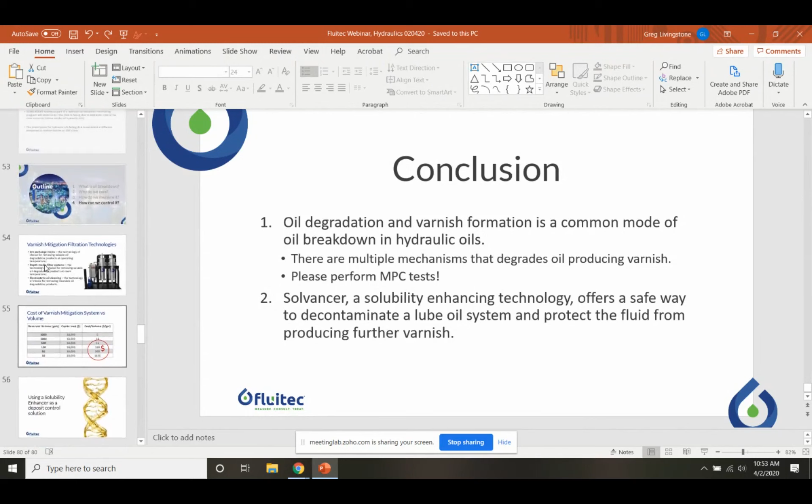And then the last question, this may be two parts, kind of hard to understand. What tests do you conduct on new and used fluid? All right. So on new fluids, there's a wide range of different tests that people will do. OEMs may require certain tests in terms of qualifying a new oil for use in a particular application, which you may not run, say, for an oil condition monitoring program.

One example is the turbine oil stability test, ASTM D943. In some cases, tests on some fluids may fail after a couple thousand hours. Some fluids, the maximum limit on the test is 10,000 hours. Clearly, this is not a suitable test to do for a condition monitoring program. So there are some unique tests that are required for new oils that OEMs will require to make sure the fluid has sufficient oxidative stability and will be able to perform long term.

But for in-service fluids, the most important thing is understanding what is the mode of failure for that fluid in this particular application, and then what oil analysis tests you're going to be running to measure that mode of failure. And in the world of hydraulic oils, measuring contaminants, so ISO particle count and elemental spectroscopy, is really important for understanding where metals and other foreign contaminants may ingress into the fluid.

Water, certainly Karl Fischer is a good test. Understanding what tests will illustrate if the fluid can interact with contaminants, we would look at ASTM D892, the foam test, to see how it interacts with air, or the air release test as well. And also D1401 is a demulsibility test, so we would recommend that.

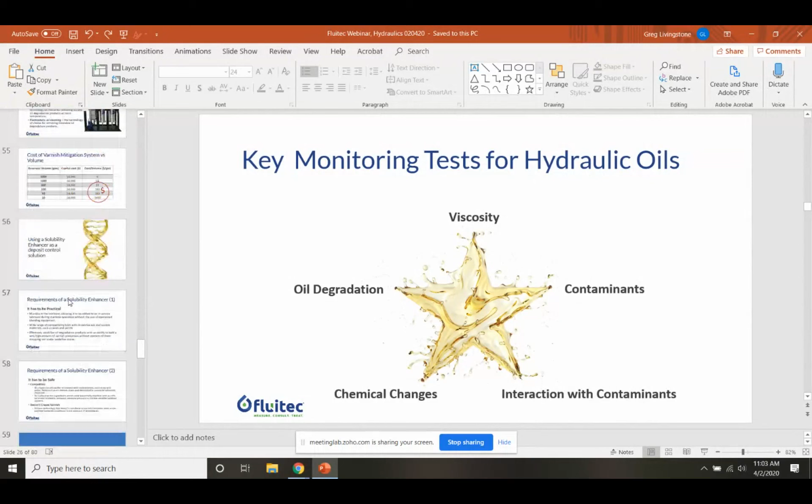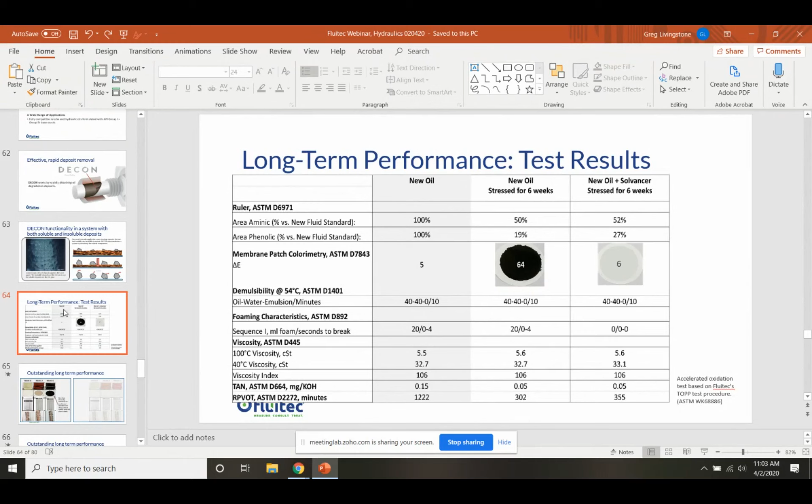That's a really good question and a very challenging one to answer. Every application is different because the generation of degradation products is different. In this particular case, we added Solvancer to a turbine oil that we beat up with a ton of thermal stress for a really long period of time. We're not showing it here, but we've run this for much longer than 18 weeks, and we are still seeing single digit MPC values. So we would expect this to last for a very long time in an oxidative environment. But trying to quantify that more really comes down to a specific application.

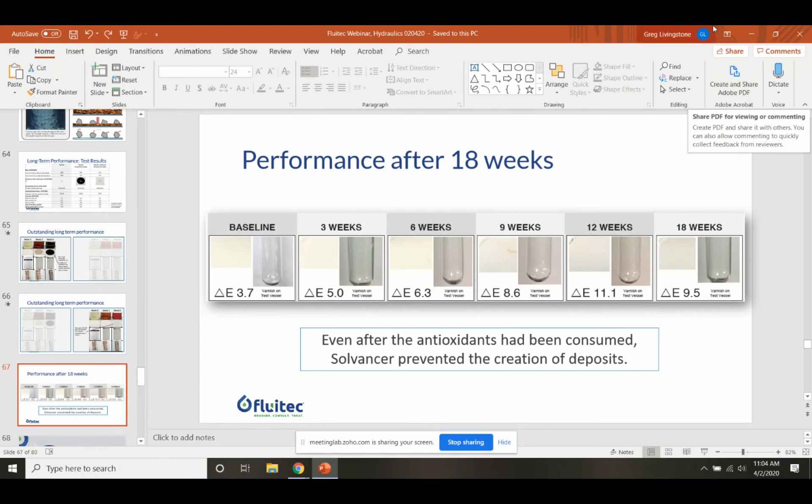Hey, Greg, there are probably 25 other questions, and they're all really good questions, and there's no way we're going to get through these. We wanted to cut it off at an hour. But we know who asked these questions, so we can get back with each of you on all of them, unless you want to take one or two more. I think we should respect our time limitations here, and I'm very grateful for everyone staying on for as long as you have. One other comment: several people asked whether this presentation and the recording will be available, and yes to both. We'll send out the presentation and the recorded version to everyone that was in attendance. Great, excellent.